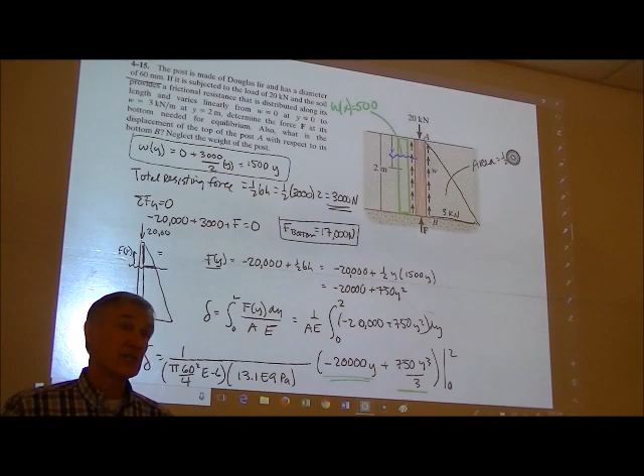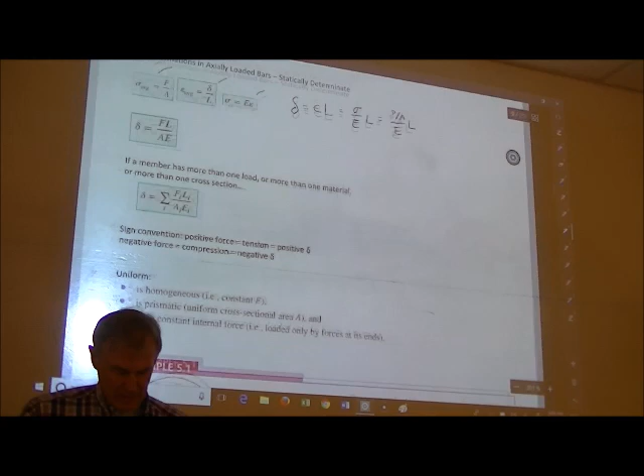And I'm just going to back up a little bit. Oh, wait a minute, it's not in this one. It's on this one. So let me see if I still got it. Yeah, here's the list of equations I just copied out of the book. Where are they? No, I guess I didn't do it. No, I'm so sorry, I don't have them. Because this is dynamics, and this is that. Well, anyway, I started copying all the equations out of the book.

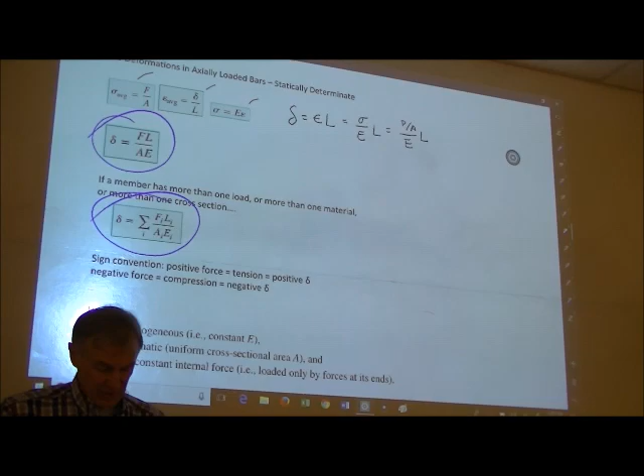Okay, so last time we talked about axial deformation. We derived our delta equals FL over AE magic equation. We talked about the fact that deltas are the sum of all of those things, depending on what kind of configuration it is. We talked about that one, and we did that one.

And then we did those which were just a little bit odd. So this isn't a big part of the course, but it's a good skill to know. I might be able to give you a small question on an exam. Sometimes on exams we do big questions, which would be the most important questions, and maybe some small point questions, like 10-point questions, to see if you understand some of the minor concepts. So this would not be a 25-point question, but I might give it a 5 or 10-point question on something like this to see how much you remember.

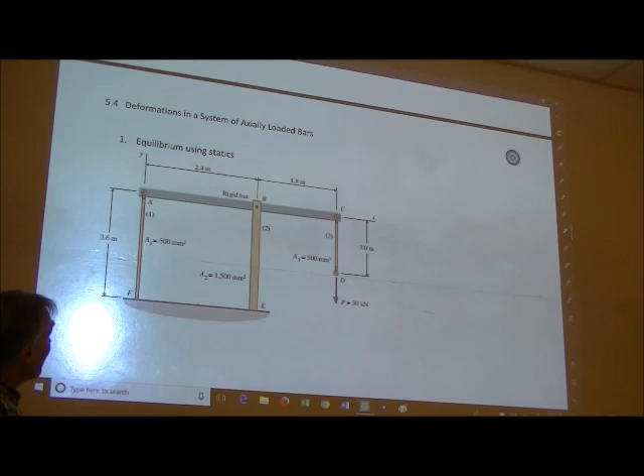All right, let's talk about axial loaded bar systems, or systems of axial loaded bars. This is pretty straightforward, I think, but if you're going to pull down on here, you're going to cause... okay, the concept of the rigid bar means that often there's some piece of this structure that, quote, doesn't change shape, right? It's rigid and made of some massive material compared to the rest of the stuff. Even if it does bend a little bit, it doesn't bend enough for us to take into account its own deflection.

And we'll get to beam deflection and bending anyway, but for right now, that's a rigid bar. All right, so what do you suppose is going to be the deflection of those other two bars? What would you think? If I'm pulling down here, is this one going to be in compression or tension? Is this one going to be in compression or tension? What do you think?

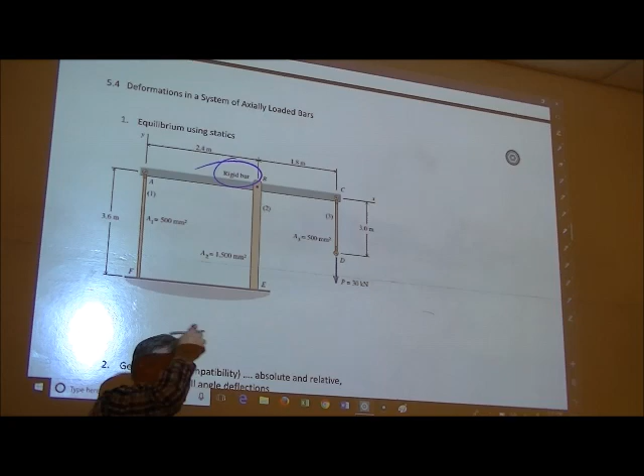Tension for A and compression for B. So if you sum the moments about this point, that's a good way of getting started. Or you can sum moments about the other one. But if I did that, I know that this one has to be going down, which means this bar is going up—there's going to be tension in this bar.

If you sum the moments about this point, then the force in this one has to be going up. So anytime you have force toward a joint, that's a compression joint. Anytime you have force away or pulling away from the joint, that's a tension member.

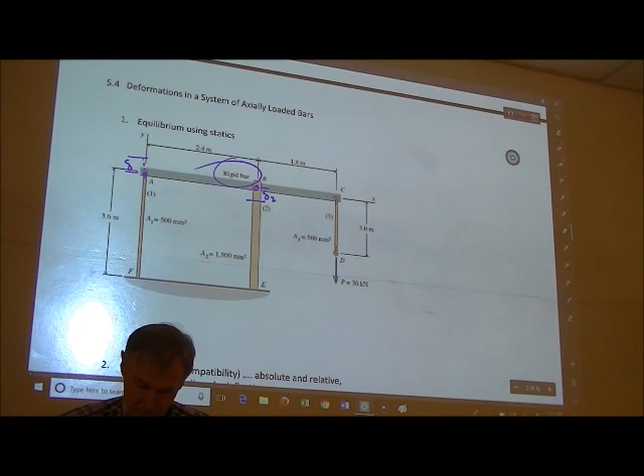So what's going to happen is this one is going to deflect upward when it gets there—that's the delta. And this one is going to be deflected downward, so that'll be the delta of 2. Then this one, because it's a rigid bar, you just connect those lines, assuming a straight line. And now this one would be the delta of C, we'll call it. So something like that will happen.

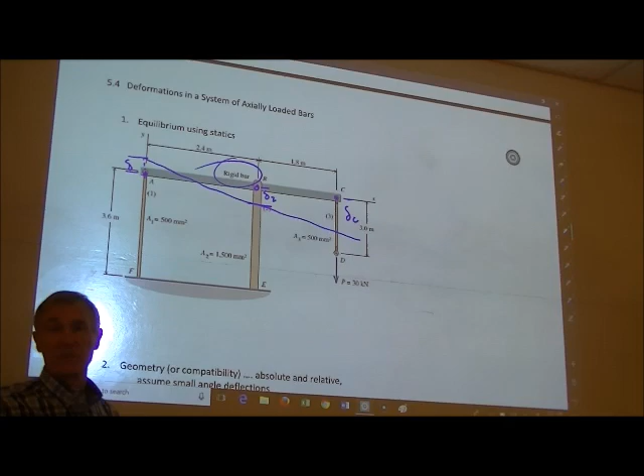Does that make sense? So what we'll do is use systems of similar triangles in order to find out what the total deflections might be.

Now this particular one here, if this is point C and this is point D, D may actually have some of its own delta as well. In other words, it may be stretched, so you may have not only the delta of C, but the delta of its own member that you have to take into account to find out the total new position of D.

Make sense? All right, let's try it. Are we assuming F is locked into the ground? Yeah, F is a pin connection—well, you can't really have two pin connections like that without it being unstable. But in this case, let's call it a fixed support. That'll work okay, and that way it's a stable structure, it doesn't tilt from side to side, and I think the equations will all apply to it.

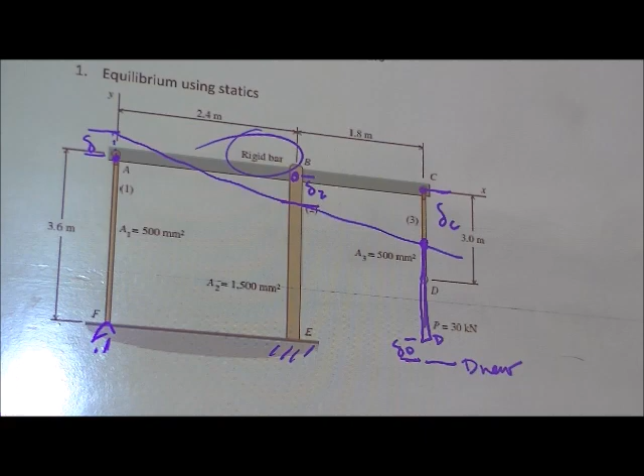So our process is we're going to use equilibrium using statics, geometry or compatibility, and we may do some absolute versus relative. What I would say is this is the absolute—in other words, that is the new position of that.

And then this delta D is going to be equal to delta C—let's put it this way. There's a textbook nomenclature called V, which means position. So what I want to say here is the position of D, V of D, is equal to delta C plus delta D. Does that make sense?

We're going to have the new position of C plus this—let me put it this way. Since that one's not a stretch, we'll call that V, VC—this is probably better. I think this is probably the way the book does it.

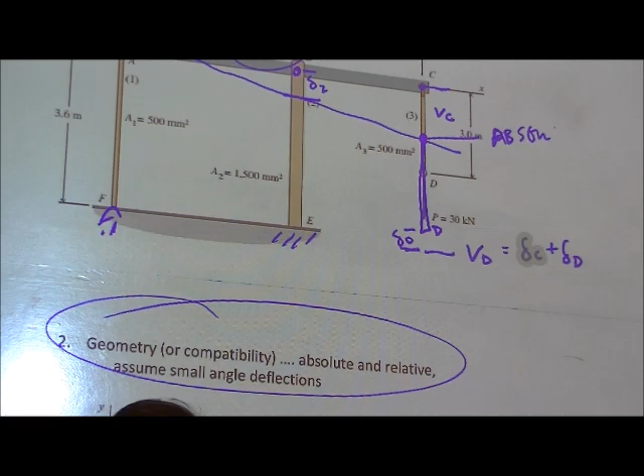In other words, these two are changing position because of delta. This one is changing position just because it's a rigid bar. And then the new position of D would be the new position of C plus the stretch in the bar. So that's what I mean by absolute and relative—this one would be absolute, and this one would be some sort of plus relative.

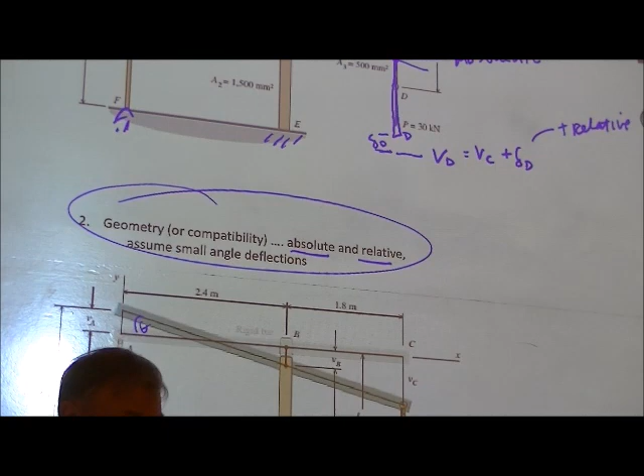We're also going to assume small angle deflections. In other words, at this point we're not considering that these thetas are going to be very meaningful—we're going to use small deflections, small displacements. So again, the process: we'll start with equilibrium, then look at some geometry, and then do the force deformation equation for each part.

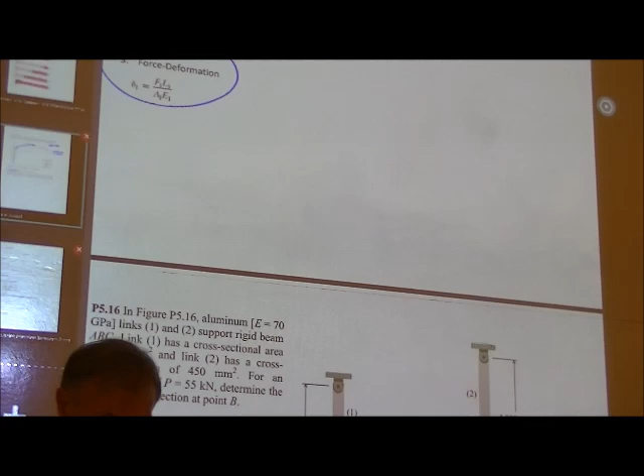All right, so let's try it. And where's my notes?

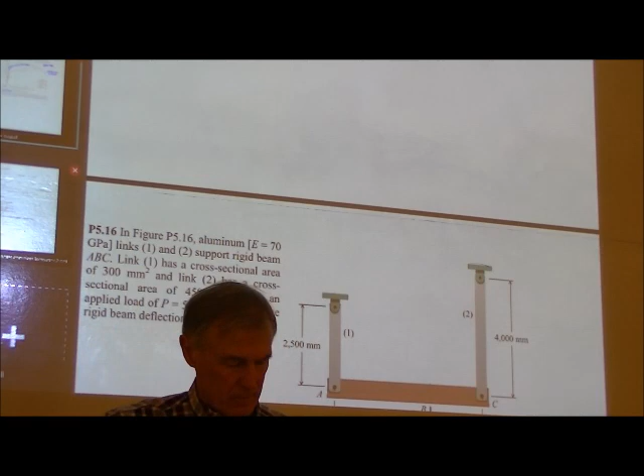All right, so figure 516, we have an aluminum link and a rigid beam. Actually, both of them look like they're aluminum, and the beam ABC is rigid. Link 1 has a cross-sectional area of 300 millimeters squared, and link 2 has a cross-sectional area of 450 millimeters squared. We're going to apply a load of 55 kilonewtons and determine the beam deflection at B.

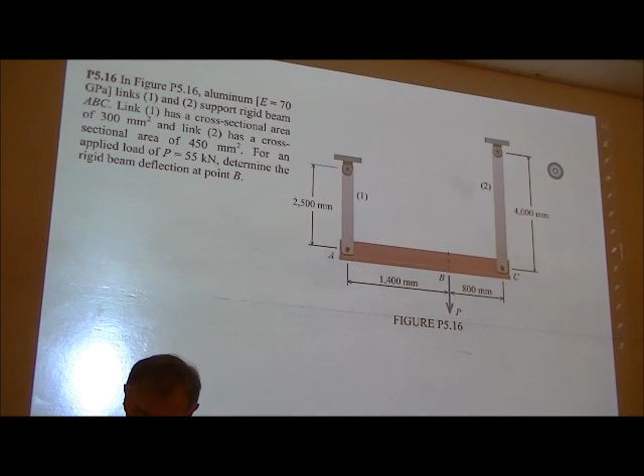All right, before we even get started, let's imagine what it might look like. I'm going to be pulling down here, so this one is going to have some stretch in it—there's going to be some deflection. This is going to have some stretch in it too, so here's going to be the new position of the bar.

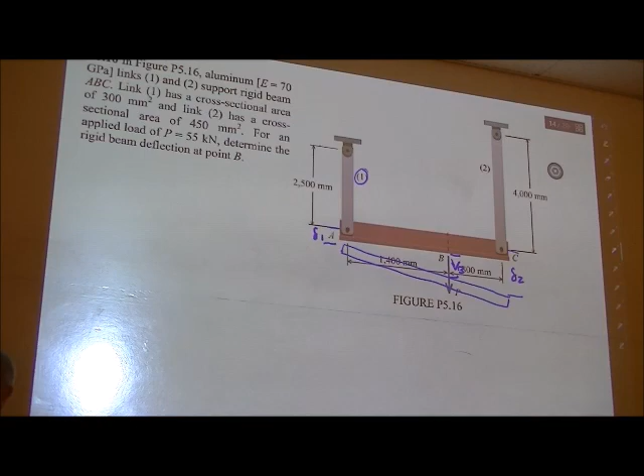So what we're looking for is this V and this delta. We'll call that delta 1, because it's bar 1, and delta 2, because it's bar 2. The V is going to be the position, and there's no actual stretch, no actual delta that we're going to be doing there. Does that make sense?

All right, let's see what we got. Start with statics, equilibrium. I'm going to sum the moments about A. Here I've got minus—let's see, P here says it's equal to 55 kilonewtons, so minus 55 kilonewtons times this 1.4 meters.

And so that's going down. This one is going to be in tension, it's going to be pulling up. So I'm going to say plus force in 2, and the lever arm there is 1,400 and 800, so that's 2.2 meters. And that's equal to 0. So I can solve for the force in 2 is equal to 35 kilonewtons.

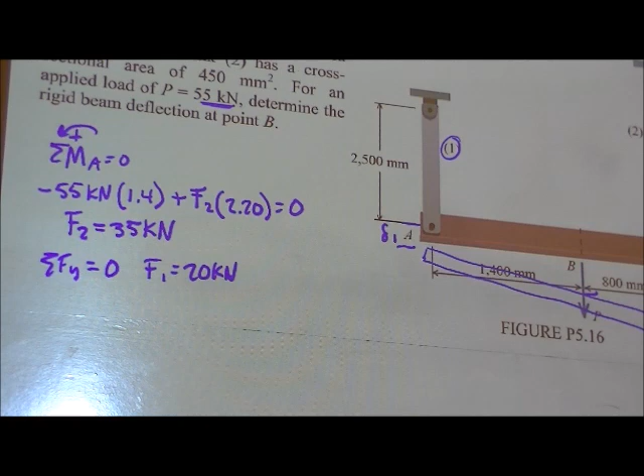And I can sum of the forces in the y equal to 0, and I can find F1 is equal to 20 kilonewtons. Nice round numbers on these textbook problems. So those are the two forces that we need to start with. That's the way we get started.

All right, next thing we do—I better put equilibrium. Next thing we're going to do is the compatibility, right? So compatibility. All right, so that says that

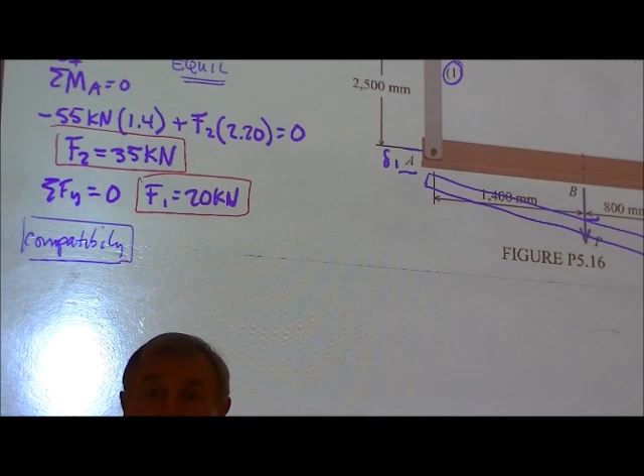In this case, the compatibility is just this similar triangles look. So I'm going to say that delta here, delta 1 and delta 2—let's see, so there's going to be this, that, so B, B. This is going to be my similar triangle. It's going to take into account that delta.

All right, so I'm going to say that delta 2 minus delta 1 over the total length is going to be this triangle right here. So that's going to be, the total length is 2.2 meters. That's going to be equal to VB minus delta 1 over 1.4 meters. So what I'm defining here is this distance here, that similar triangle, and then this one right here.

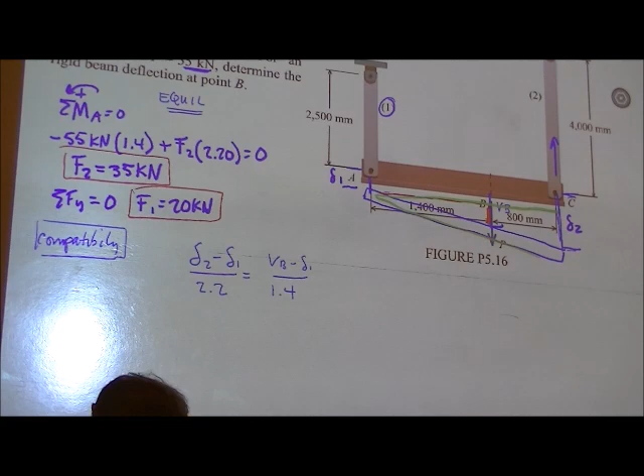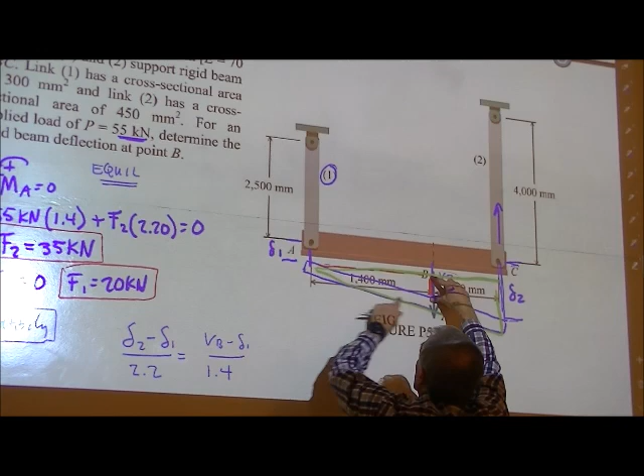Does that make sense? So let me get in here and I'll point to it. This is my—because it's pulling all the way down, this is one triangle right here, and then this is the other triangle here. So this distance here, VB minus delta 1 over this distance, is the same as delta 2 minus delta 1 over this total distance.

What's V? V is a position, because there's not a stretch really associated. We use delta for the actual elongation of a beam or a bar or something, and so a position is just V. That makes sense. So V minus the stretch in delta 1 is how much that distance is right there—the triangle set.

All right, so that's compatibility. Can't really do anything with that until we then look at the force displacement. So let's look at force displacement.

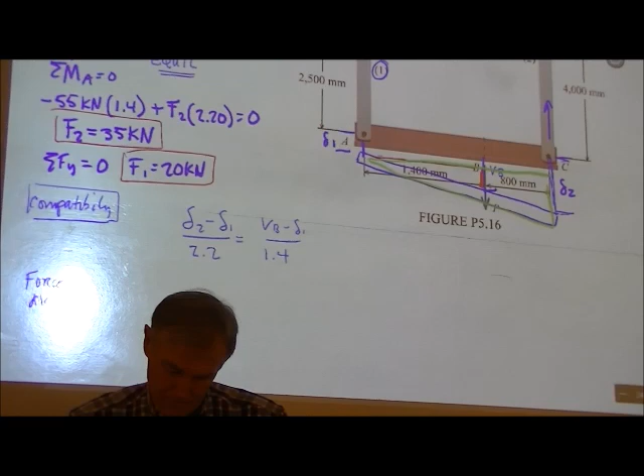All right, now here I do the delta is equal to FL over AE of everything that does stretch. Let's see what that is. So we'll say delta 1 is equal to F1 L1 over A1 E1. And these are all in tension, so we don't have to worry about positives or negatives there.

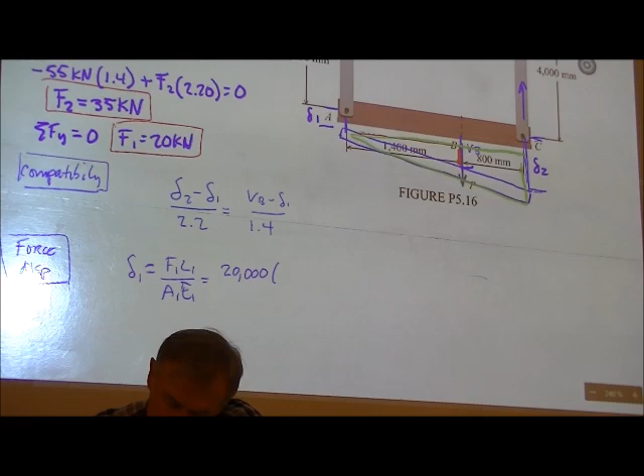So let's see what I got. Actually, I know what F1 is, so I'm just going to put it in here. This is going to be 20,000 times L1, and that's going to be 2.5 meters—that's that distance. I'm given the area of link 1, and that is, this cross-sectional area, 300. Now those are millimeters squared, so to make it into meters squared, you have to divide by 1,000,000. So that would be E minus 6 meters squared times E of aluminum is 70.

And gigapascals is E to the 9th. And so there I can calculate the delta, and that is going to be 0.00238 meters. And you can keep it in meters or you can put it into millimeters, but I think meters works okay.

All right, how about delta 2? That's going to be F2 L2 over A2 E2. And I have that is going to be 35,000. It's got a different length, so that's 4 meters. It's got a different cross-sectional area, so that'd be 450 E minus 6. And it does have the same modulus of elasticity of 70 E to the 9th. And I can get that is equal to 0.00444.

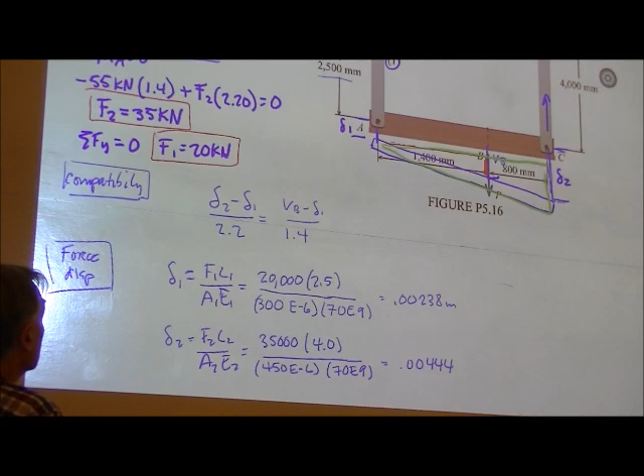All right, so then what do we do? We just plug them into the equation that works. I'm going to plug this one in here, and that one in there, and solve for VB. That's what we're looking for. So how did I do that? I just found delta VB was equal to 0.00369 meters. I'll let you guys crank through all the arithmetic.

So this is kind of typical of a statically determinate system of bars. Statically determinate means there's no unknowns, we can solve the equilibrium equations with statics. These are fairly straightforward. Now we're going to move into statically indeterminate structures, which are a little more complicated. But they're just as much fun, there's just a little more work. All right, any questions about this?

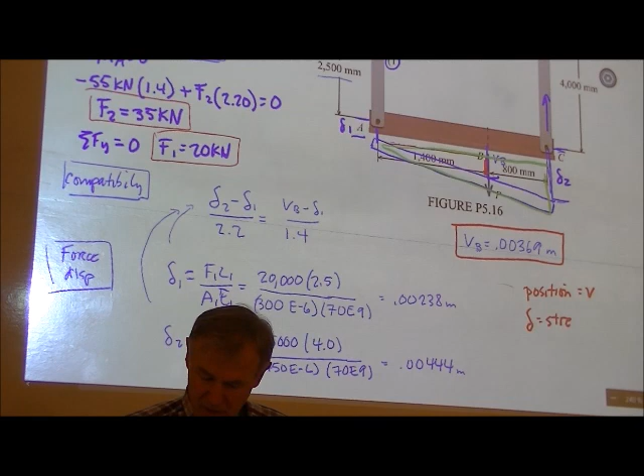Well, I guess we introduced a concept here of position is equal to a V, and delta is equal to a stretch. So if I forget and use V's and deltas interchangeably, they shouldn't really be interchangeable. They should be used properly here, but sometimes I'll forget, so you help remind me.

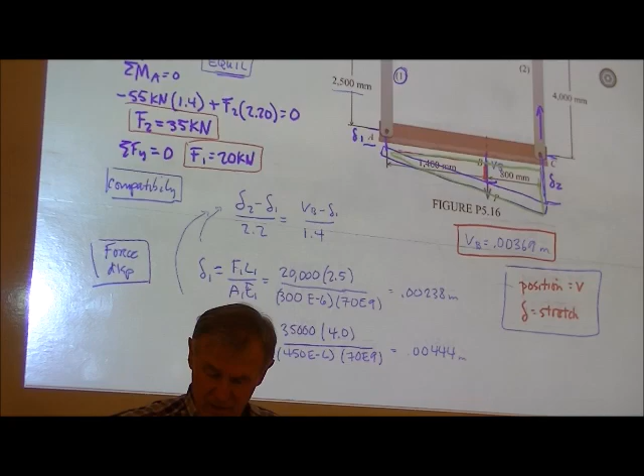All right, so let's just look at this picture here. What is the difference between these two pictures? This is the one we just did, or one just like it. No, it is exactly the one we just did. What about this one? Why is this one statically indeterminate?

We don't know how much force is going through each of the bars. Yeah, we don't know how to distribute the forces. We know that all three of those bars, well, I guess we don't know for sure, but we would expect that all three of those bars are going to stretch as you pull it down. But how much force to distribute to each of those bars depends on how much they stretch and what those materials might be. For example, let's say the one on the right was a rubber band and the other two bars were steel, would you expect the rubber band would take very much of the force? Or how much would it stretch?

Not very much, right? Because it's not going to take very much of the force since it's made of rubber. How about if the middle one was a rubber band? Would you then expect most of the force to be distributed on the outside ones? Yeah. So that's the kind of way you can talk yourself into thinking that I can't really solve for those forces until I know what material they are and how much stretch they might endure.

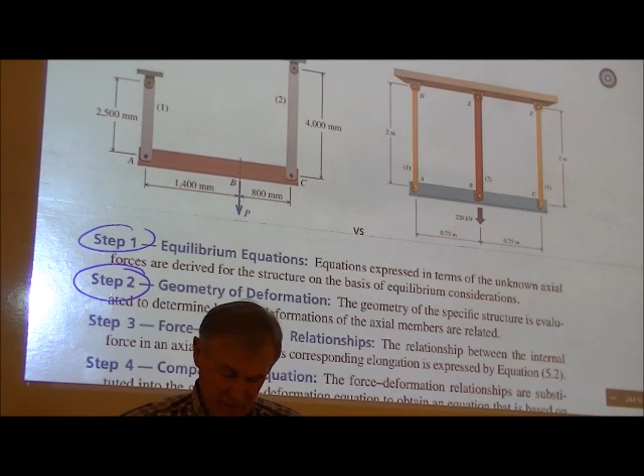And so anyway, we're going to follow the same process. We're going to look at equilibrium, we're going to look at geometry of deformation, and then we're going to do force displacement relationships. The only thing we're going to add is the fact that we're going to put all of these things together into an equation and try to solve for the unknowns. And which equation we use, whether it be the force equation or the displacement equation, kind of depends on the situation, all right?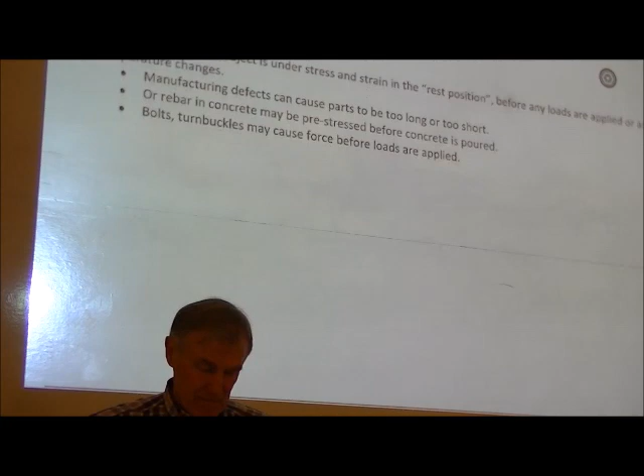So let's see what we got. We're going to talk about misfits and pre-strains next time, but we had some misfits that we talked about last time. Remember when a hole was maybe too big or something like that, and it would actually put the force on another member before it starts stretching on one of the members?

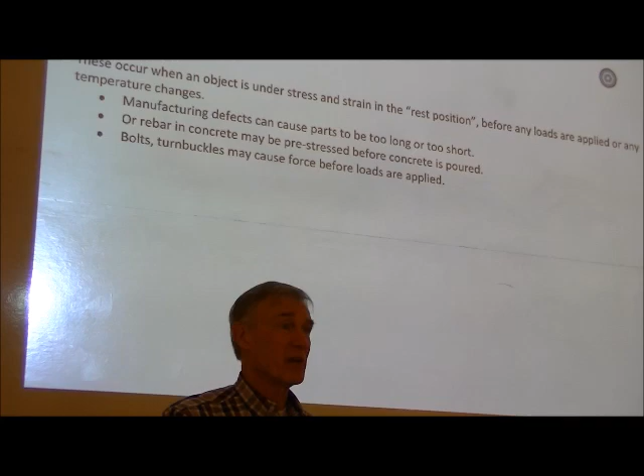So we'll talk about misfits and pre-strains more later. But today, I think we can get to the fact that sometimes there's a gap. Like this one, there's a gap there and there, and so something has to expand and then fill up the gap. That could be a manufacturing defect, that could be just the fact of, whatever, somebody just nailed it improperly, might have a gap like that. We're going to actually go through this one today. So that would be a gap or a pre-strain.

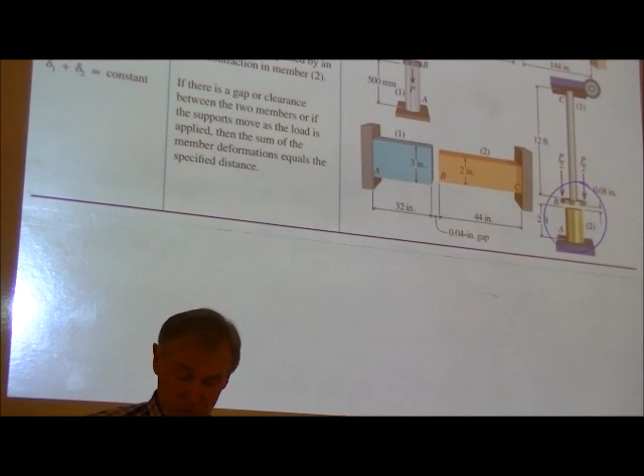So concrete is a good way of thinking about pre-stressed conditions. Anybody know anything about pre-stressed concrete? Well, what pre-stressed concrete is, is that you actually stretch the steel, pour the concrete, and then let the steel go. And so the concrete is actually in compression at the beginning, and it just makes it a lot stronger when we do that. So pre-stressed concrete is a real common way of building in stress, the right kind of stress, before you even apply any other kinds of loads.

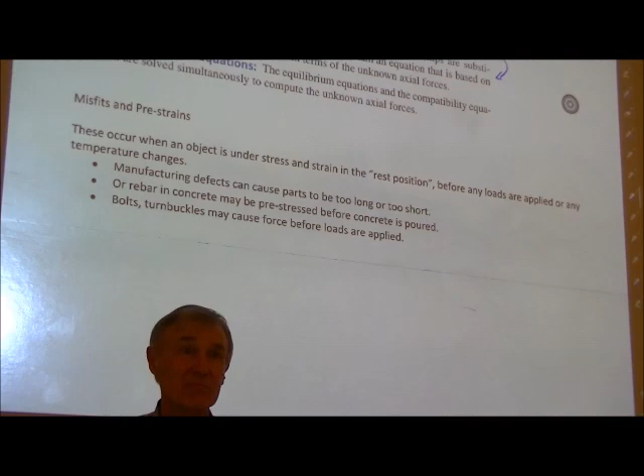All right, let's talk about the process here. Again, we're just going to set up equilibrium equations, use geometry of deformation, and do the force deformation relationships.

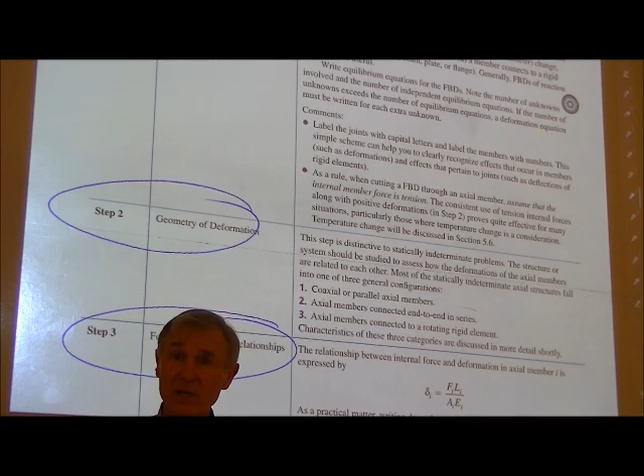I didn't put this in your notes, it's straight out of the book, but if you want some long-winded examples of what we're going to talk about, you're welcome to read those. Those are good. When we draw free body diagrams, we'll try to draw the free body diagram of the joint.

You can see which way the forces go. As a rule, we're going to assume tension and assume a positive delta. In other words, we're going to mostly draw the forces, even if we know they're in compression, in tension, and draw all the deltas as positive, even if we know they're going to be negative. That way, when we solve for the forces, it'll be a negative force, which should agree with our assumption, and when we solve for delta, it'll be a negative delta, which will agree with our understanding, not the way we drew it.

So we should get used to, when we solve things, getting negative forces and negative deltas.

All right, let's see what we got. A bunch of different kinds of problems we're going to go through over the next couple days. Today we're going to do axial loaded bars, and we're going to do this gap one.

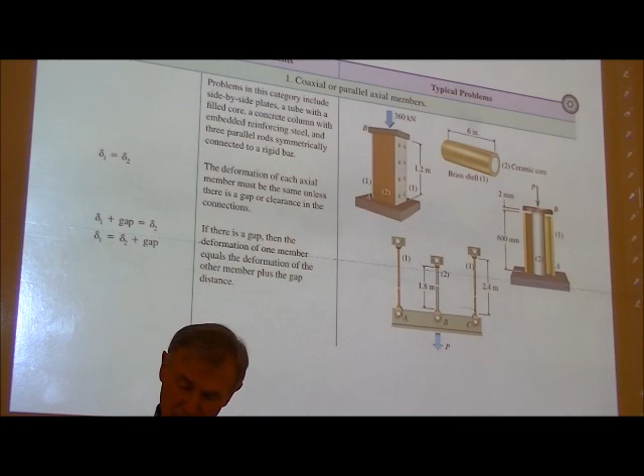All right, so let's talk about this. Here is a concrete column that has a point load. Now, first of all, let's go back to what we talked about last time. What do we assume about arrows with point loads here? What are we generally assuming?

We're assuming that all the force is concentrated on a little teeny tiny spot. What are we assuming? Equal distribution. Yeah, we're assuming an equal distribution using what principle? St. Venant's principle. So even if it actually sits on the column with a point load, we're assuming that with a very small difference in depth, just not very far down, everything's going to even out and it'll be evenly distributed.

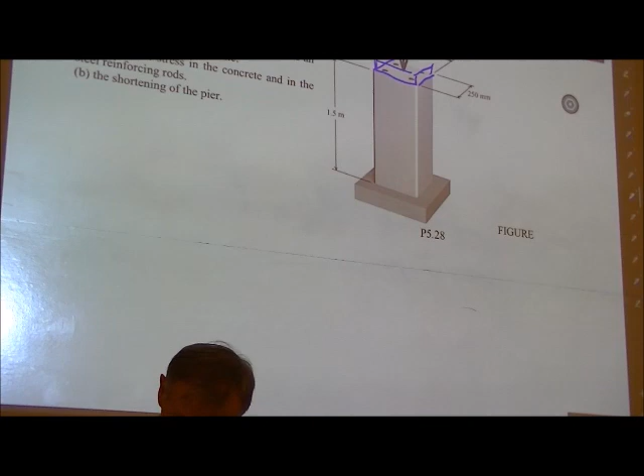Another way of drawing this thing would be to put a big steel plate on the top, like this, right? And then you could say that I'm going to push on the plate, and by the time it gets down to the actual work, it's already distributed, if you will, all right? But we're not going to focus too much on that. All we're going to do is assume it's evenly distributed, and pretty nice.

All right, let's see what we got. So we have a 670,000 Newton load on top of this column, and it's got 4 steel bars in it. This is concrete. We want to find the stresses in each of the rods and the stress in the concrete.

Okay? Now, this is all built together as one assembly, which means that if it all shrinks together, the deltas are going to all be the same. Okay? But the forces, how the concrete and the bars distribute those forces, are going to be a little bit different. So let's see what we got.

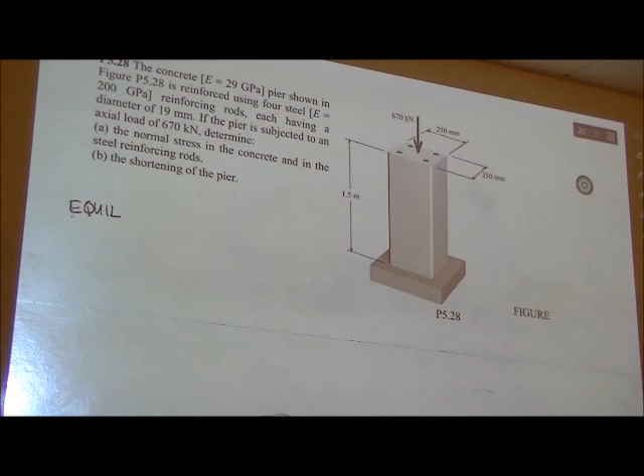First of all, let's do equilibrium. All right, so I'm going to say that the steel is going to be pushing up, and I'm going to say that the concrete is going to push up. So let's just say it here: the force of the steel plus the force of the concrete minus the 670,000 newtons is equal to 0. All right, that's all we can do for equilibrium.

Let's talk about geometry. All right, here the only thing we're talking about is what do the deflections look like? And all we're going to say here is that the deflection of the steel equals the deflection of the concrete. So that's all there is: deflection of the steel equals the deflection of the concrete. Everything's stuck together.

Now we do force deflection, or force displacement, on each of the pieces. So we'll say force deflection.

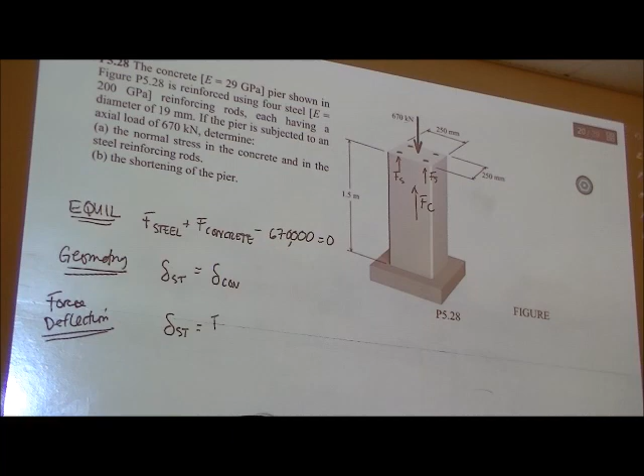All right, I'm going to say that the delta of the steel is equal to the force in the steel times the length over the area times E.

All right, let's first talk about areas. What is the area of the steel? Well, steel is rods, so let's see what we got. Steel: pi d squared over 4. Yep, is equal to pi d squared over 4. And so these are pi.

The diameter is 19 millimeters over 4, and I'll generally just keep them as millimeters, and then I multiply it by E minus 6, because you got 1,000 millimeters per meter. You got that squared. And that's equal to 283.52 E to the minus 6 meters squared.

Okay, that's the area of one. But I got 4 of them, don't I? So I have to put that 4 in someplace here. I can either multiply this by 4 right here, or I can put a 4 over here. Either way you do it, but you have to multiply it by 4. So I'm gonna put it in when I put the numbers in. So let's just put it this way.

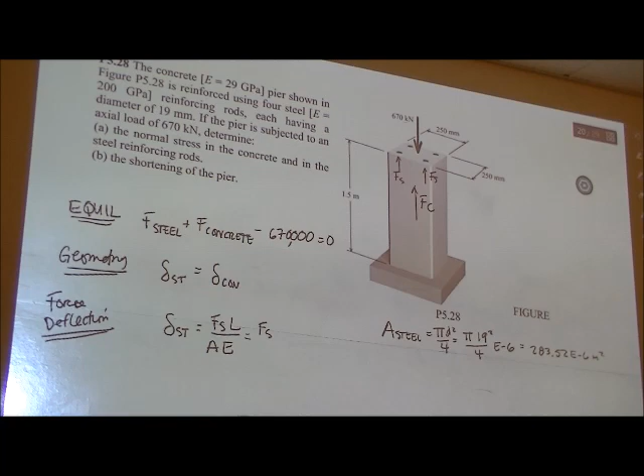So this is going to be the force in the steel times length is 1.5 meters. All right, so I'm going to say 4 times 283.52 e minus 6, that's my area. And then the modulus of elasticity of the steel is 200 gigapascals, so 200 E9.

I have a quick question. Yep. Are you allowed to put the 4 with the equilibrium forces? You put 4 times the steel? Yeah, because technically you drew 4, right? Even though you are only showing 2 on that. Like the force is going up. Does that make sense? Yeah, okay, that's a really good question.

Then if it's only like representing one total force of the steel, shouldn't there then be one arrow going up? Okay. You can... I don't think so. The reason is because that geometry equation requires that those geometries get matched up. So let me proceed to the next step, and then let's ask that question again and see if it makes sense, okay? So that's a really good question. Do I have to multiply the area by 4, or can I multiply the force up there by 4? And I believe that multiplying the area by 4 is the right way to do it.

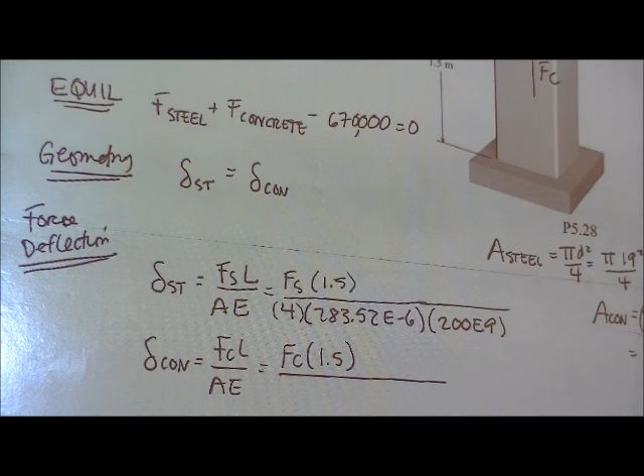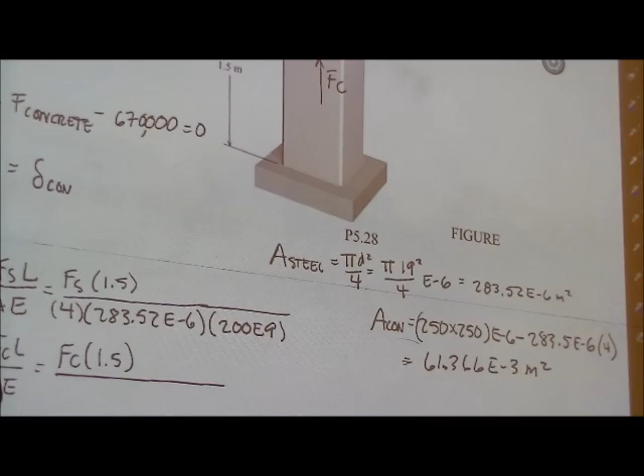All right, so let's go ahead and put the area and the modulus of elasticity over here. So this is going to be 61.36 E minus 3 meters squared times concrete is 29 E to the 9th pascals.

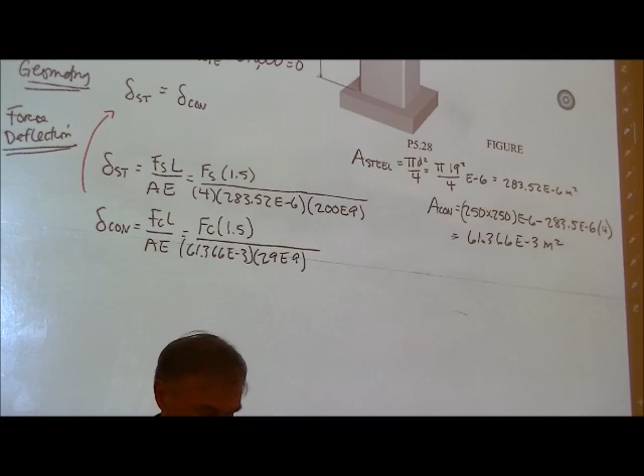And now what we're going to do is, I can't really solve for those because I have 4 unknowns. I don't know the deltas and I don't know the forces. So what do we do with 2 equations, 4 unknowns? Well, we start substituting and see what we can get. So the first thing we're going to do here is I'm going to substitute both of these guys into that, and let's see what we get. So let's solve this for one of the forces. I'm going to set this up. I'm going to say force of the steel times 1.5 over, and I multiplied all this stuff out.

So I say that that is equal to 226.8 E to the 6th. And that's going to be equal to the force of the...

Okay, I'm sorry, I'm putting all this stuff into those equations. So this is the force of the concrete, and that's got 1.5 as well. And I multiplied all that stuff on the bottom there, and that is 1778 E to the 6th.

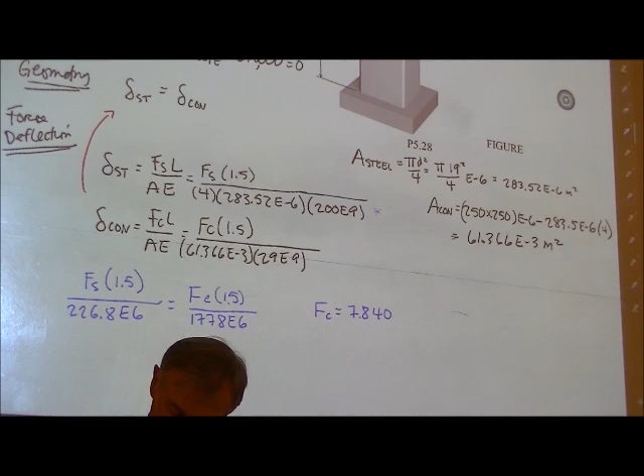And now I can get the force of the concrete is some factor of the force of the steel, and that is 7.840 force of the steel.

Okay, everybody see what I did there? Just plug those things into that geometry equation. Now I have the factor, and now I have the force in the concrete as a factor of the force of the steel. And now I can plug it into the equilibrium equation and start solving for something.

So now I solve this into that equation. So let's see what I got. So the force of the steel plus the force of the concrete, which is 7.840 force of the steel...

equals 670,000 newtons, and I can solve that for the force of the steel, which is equal to 75,796, and the force of the concrete is equal to 594,204 newtons.

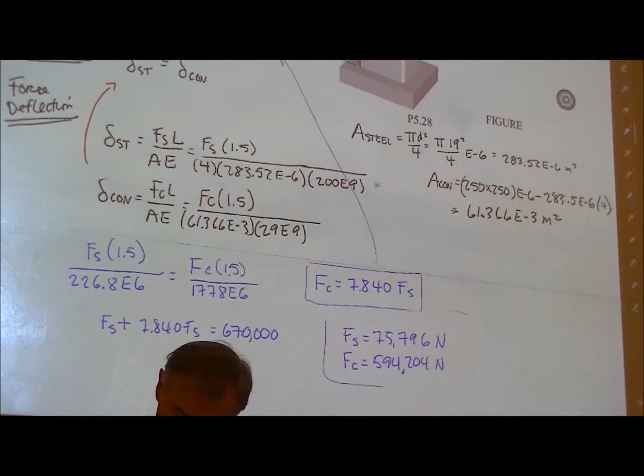All right, I don't want to go down too big of a rat hole here, but let's imagine that instead of multiplying the area by 4 up there, I kept all those the same. What that would have meant was this would have been divided by 4. In other words, this would have been something like 55 e to the 6th.

See what I'm saying? If this was 55 e to the 6th down here, then I would have got quite a bit different factor for the force of the steel. And plugging that into this, I would have got quite a bit different answers. It wouldn't just balance out because...

Why don't you do it and tell me? Because I didn't do it, so I don't know. Okay, but it might be. It might be, maybe you could multiply. Yeah, Rosalind, what's the answer there?

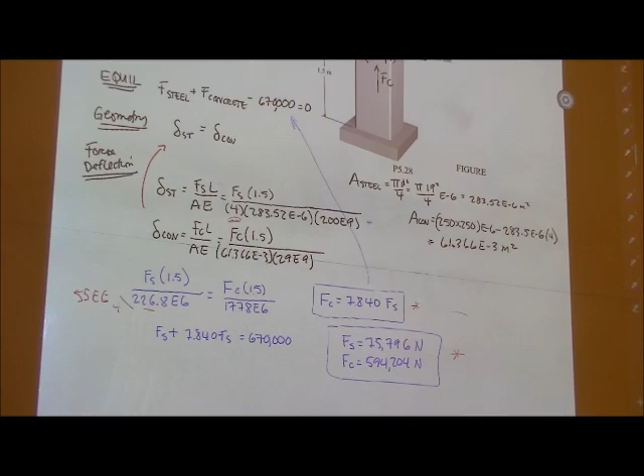Well, I'm just curious, if you don't multiply the area by 4, you would have 4 F steel plus F concrete. Yeah, that's what you'd have to do. If you had a different factor here, then you'd have 4 F steel plus FC. Maybe you still get there.

But then your deltas are wrong. Right, because then the deltas are wrong here, since I want to solve for the delta using the actual force of the steel.

I don't know, maybe you could make it work. Could you make it work? A factor for it, but you just have to find a weird place to go.

Okay, if anybody wants to play with this and tell me what the answer is, I'll work on this over the weekend and see how sensitive it is. See if you can do it both ways. Because I sometimes don't know when you add that factor versus when you don't.

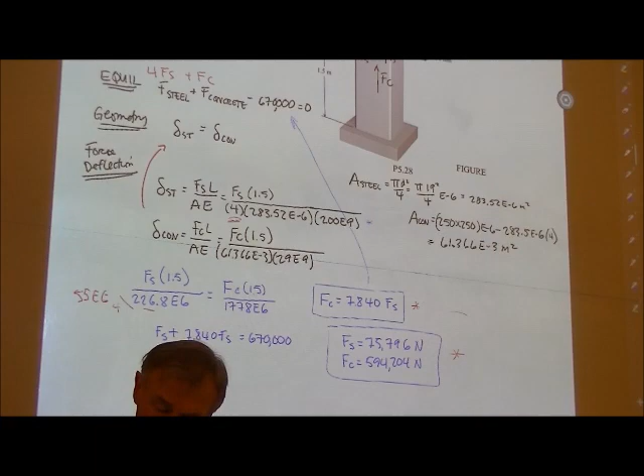All right, well, tell you what. For now, if you have 2 materials, multiply, put it in with the area. Okay, and here's a few more examples that we'll talk about.

Things like this one, this column here, where it has a plate on one side and a plate on the other side. Instead of saying you could multiply the area by 2 in this case, and I know that works, it seems logical that it would work by multiplying the force by 2 or the force by 4 in this, but aren't you just saying that the force is 2 different kinds of forces, right?

Your original steel is all of the force acting on all of the steel. Yeah. And then the other one is just a single one. It's just, yeah, single one, so...

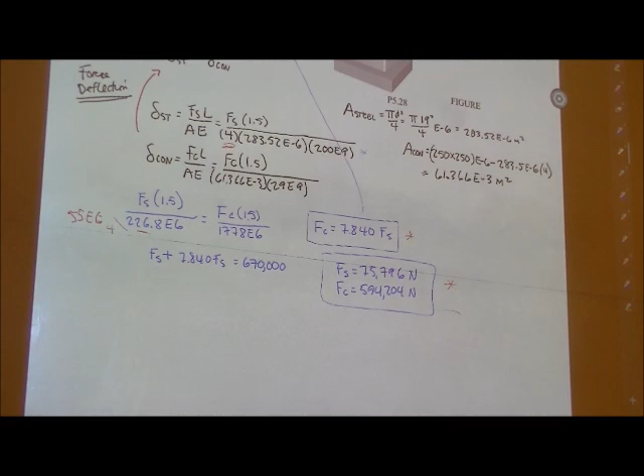You took out... yeah, it doesn't work. You need all the area in the delta function. I kind of think you need all the area to make this equation work properly.

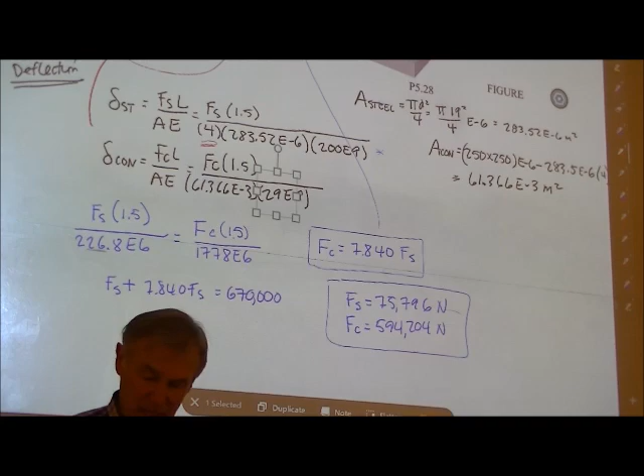I think so. So for now, let's multiply the area by 4 and not multiply the forces by 4. We'll keep the force at the total, and if anybody can prove to me it works the other way, then I'm happy to retract that. Okay, let's continue on. What we're looking for is the stress. Now that I have the forces, it's pretty easy to do the stress, isn't it?

All right, now we want to get to the shortening. What is the actual shortening? Let's find the stresses quickly. That's pretty easy. We're going to say the stress in the steel is equal to F steel over A steel, and I'll just write you the answer. That's going to be 594,204, and then we have all of the area, so that would be 4 over 2, or 4 times 283 e to the minus 6. That gives me a stress of 66.96 E6 pascals. And then the stress in the concrete is equal to the F in the concrete over the A of the concrete.

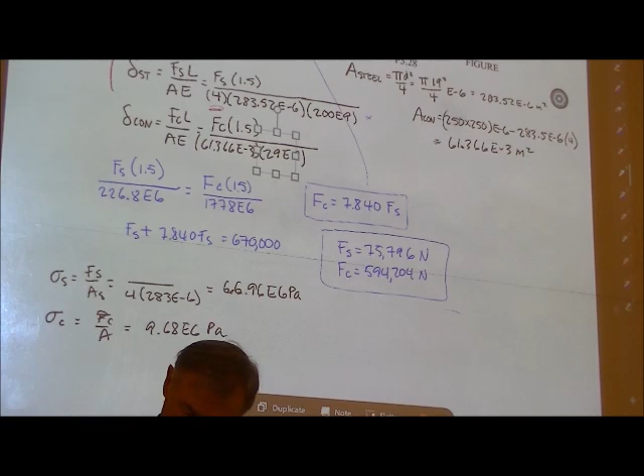That's equal to 9.68... isn't that still 75,000, not 594? Yes, beg your pardon, 75,000. Steel, 75,796. Thank you. All right, so those are the stresses.

Now the delta, you can choose either one. I still think this is probably the best way to do it. But you can take these forces now, plug them into either one of those delta equations, and you should get the same answer. That makes sense? Yeah. The 4 works, I just figured it out. It's all right, so you can have your 4 on the F steel. Your delta function has a factor of the force in it. So if you delete that 4 and just add the 4 to that top equilibrium equation, you're fine. If you divide that one by 4, and then you don't have to multiply that by 4, you should get the same thing. So it probably should work. I just didn't do that. It was bugging me.

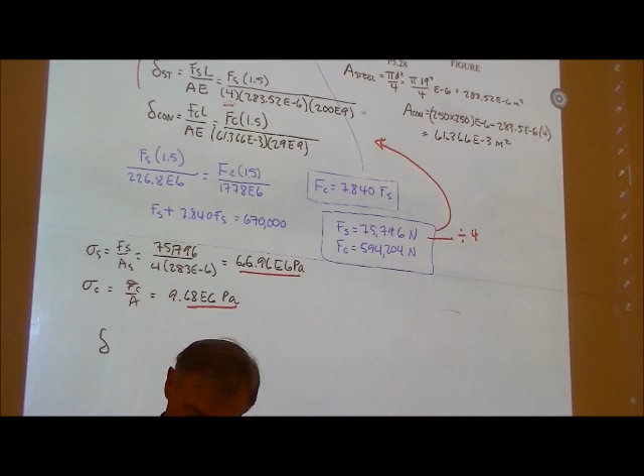All right, so the delta then is this. Delta of either one is equal to FL over AE, and I did it of the steel, and I got that equal to 501 E to the minus 6 meters. So not very much, 500 microns that it actually moves down under this kind of a load. So most of these cases we're not talking about very big deflections, but they are real. And if you get longer members, then they become a little more measurable, a little more important.

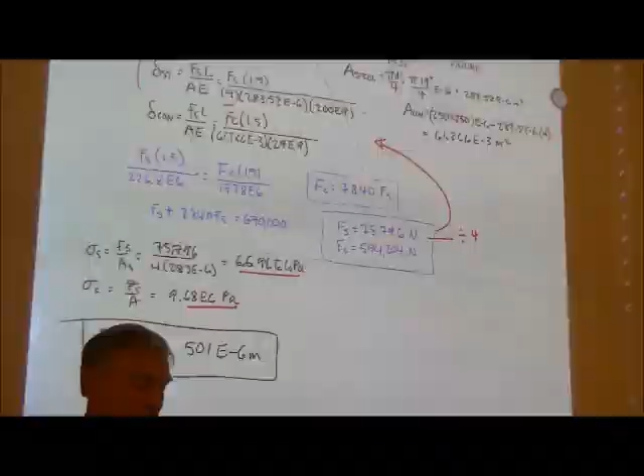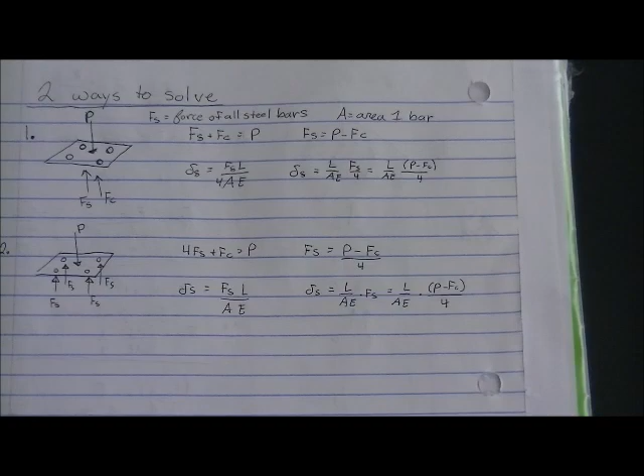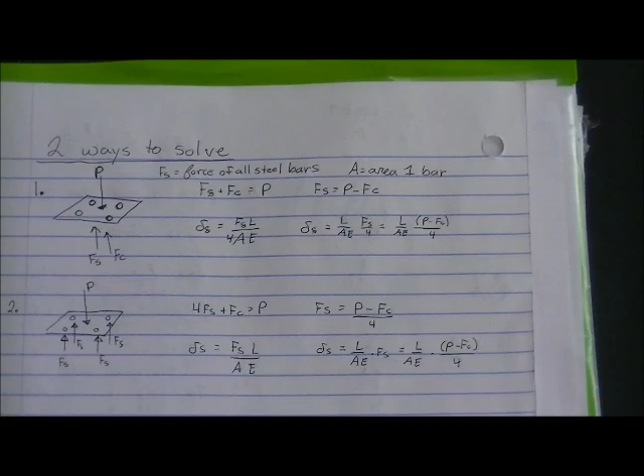Okay, this is an addendum to the class. I'm just visiting with Rosalind, our peer educator, and she did this work. I don't know if you guys can see this, but if you're careful with the forces and careful with the areas, then it doesn't matter whether you multiply the area by 4 or if you multiply the force by 4. But it kind of depends on the free body diagram. If you look over there on the left, the free body diagram in the top one, the force of the steel is the sum of all the forces, and therefore you have to multiply the force, or you have to multiply the area by 4 in order to get the total force. If you look at the bottom one, then you have 4 separate forces, and therefore each force is going to be smaller, but obviously the area is smaller. But in the end, if you're careful, then you should get the same answer, and it shouldn't matter. And obviously, if it doesn't matter, then I don't care which way you do it. All right, hope that works.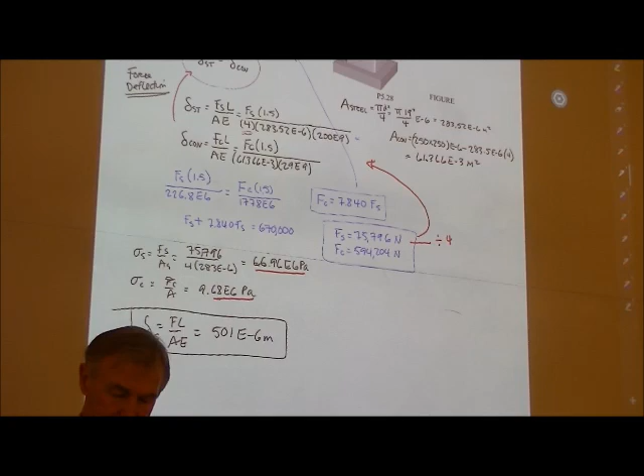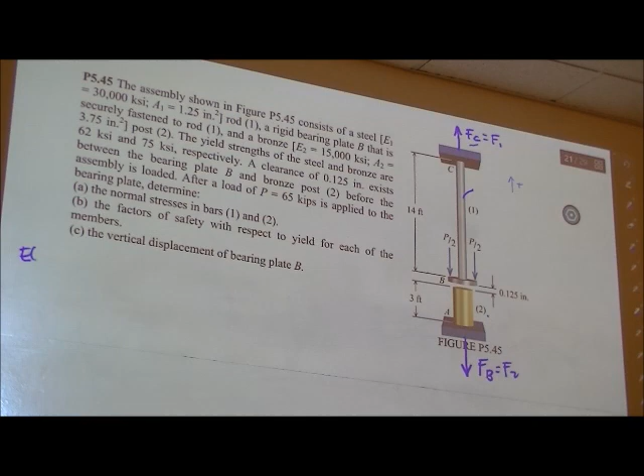All right, so let's do the equilibrium. F1 is called positive going in this direction. So equilibrium: F1 minus F2 minus this pushing force, and the pushing force is 65,000 pounds. So 65,000 pounds is equal to 0. A kip is 1,000 pounds. Those are both going down. F2 is going down, and the pushing force is going down.

All right, let's talk about the compatibility, or the geometry. Geometry, compatibility, those are kind of the same things. What it's going to say is that there's a delta stretch of 1, and there's a delta of 2, and those are going to be equal to that gap. I drew them both as positive, even though I would expect that because the top one is in tension, it will get a positive number for that. Because we know the bottom one is in compression, we should find that delta 2 will be a negative number when we get done with it. But together, they equal that gap of 0.125 inches.

All right, now we do the force displacement equations. Force displacement, and those are pretty straightforward now. I'm going to say that delta 1 is equal to F1, L1, A1, E1, and let's see what I got. I don't know what F1 is, so I'll put that as a variable. The length here is 14 feet, and we need to be in inches, so I'm going to say 14 times 12. The area of rod 1 is given here as 1.25 inches squared, right there. And the steel is 30,000 KSI, which is 30 times 10 to the 6 PSI, so that'd be 30E6. I think all those units will match up. Okay, let's, I didn't do any more multiplying there, so I'm just going to keep it there.

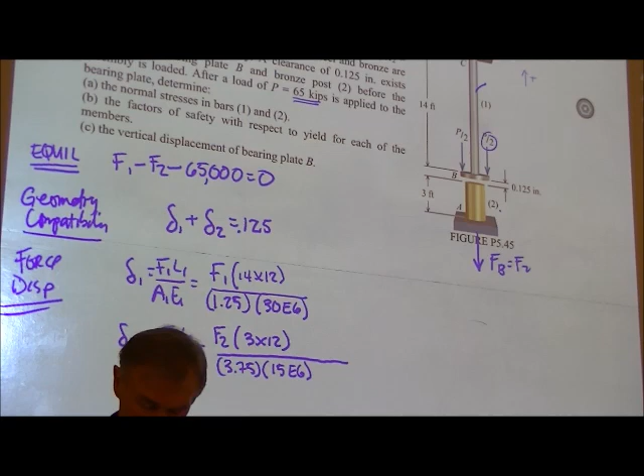And I generally will plug both of those into the geometry equations. Let's just put those in there, right there. So let's see what I got. I'm going to say that F1 plus that stuff on F2 is going to be equal to 0.125. So let's do that: F1, 14 times 12 over A1, E1. I'm just going to shortcut this so I don't have to write everything again. Plus F2, 3 times 12 over A2, E2 equals 0.125. All right? Everybody okay with that? Because I just saved a little bit of writing.

And now I can solve this in terms of one or the other. I'll solve this in terms of F1, because what I want to do is combine them, put one in terms of the other, and then put it back into the equilibrium equation. So I'm going to say here, F1 equals 0.125 minus F2 times 0.64E-6 over 4.48E-6. So now I have this in terms of F1.

I'll plug that into that equation, and let's see what I got. When I plug this in, I'm going to solve this in terms of this. So I'm going to say that this is equal to 29,902 minus 0.14285 F2. That's what this one is. Minus F2 minus 65,000 equals 0. Okay, everybody see what I did? Just did the multiply out, plugged it into that equilibrium equation. Now I can solve it for F2.

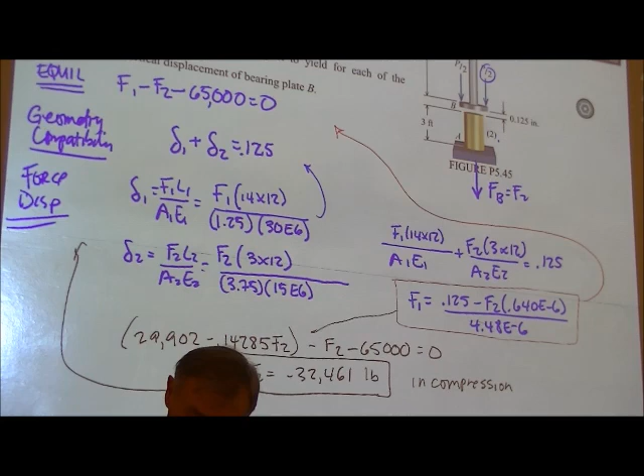You don't have to write that down, but basically it's just to tell us what's going on. Now if I plug that into my equation and solve it, I'm going to get F1 is equal to 32,000, pretty close, 32,539 pounds in tension.

Dumb question, but what point are we looking at to get that equilibrium equation? I'm drawing the equation for the whole thing. However, you could have drawn the free body diagram of that. In fact, I didn't do what I told you guys to do.

Why do we not need 2P here? Because this is P, right? And so we only took one of these? No, there's P over 2 on each side, that's all that says. They're just trying to keep the stress concentrations down by dividing it on both sides.

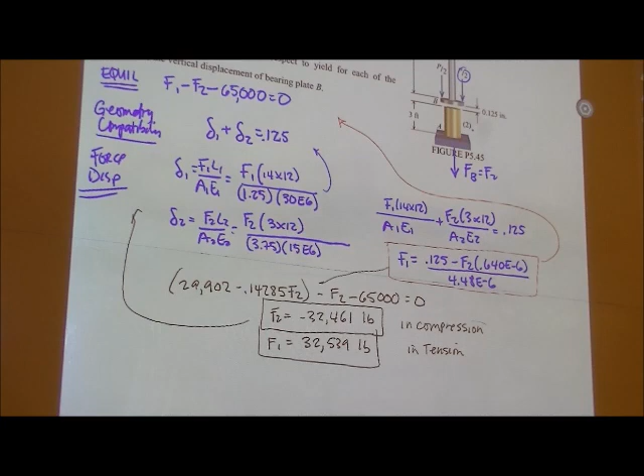So yeah, this equilibrium equation, the way the textbook does it, which I should have done, was draw a free body diagram of this part. So let's just draw a free body diagram of that part, assuming they're mated together. You get negative 65,000, and then something going up here, we'll call that F1 and then F2. That's what it means by drawing a free body diagram of the joint, the place where they meet together. Both tensions, or both forces, are going to be in tension that way if we solve it.

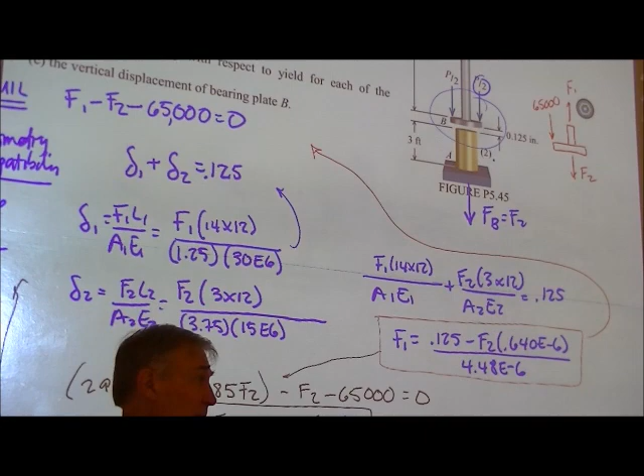All right, now that I've solved for F2, which is equal to a compression force, which we expected, now we can solve for delta. That's the more interesting thing, what is the actual displacement of this point, of B? Well, let's look at this.

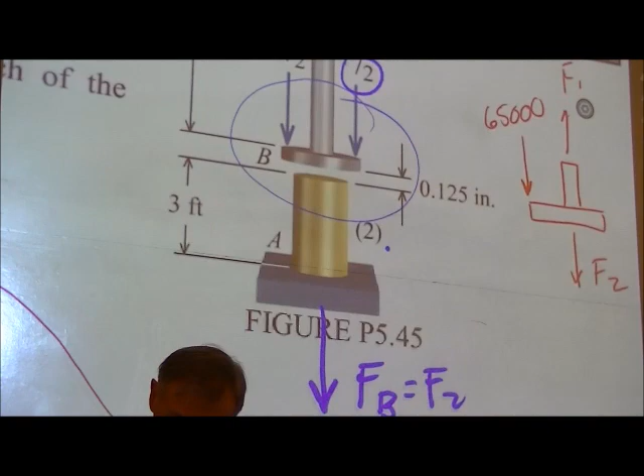Let me just zoom in here and then I'll get back so you can finish copying if you need. The actual displacement of B, assuming that's very thin, is going to be the stretch of the bar, which is going to meet there, and then the compression of that. Does that make sense? It's the stretch of the bar plus the compression. So if I need to know what it actually changes, I have to add those two together. That's really where it's at.

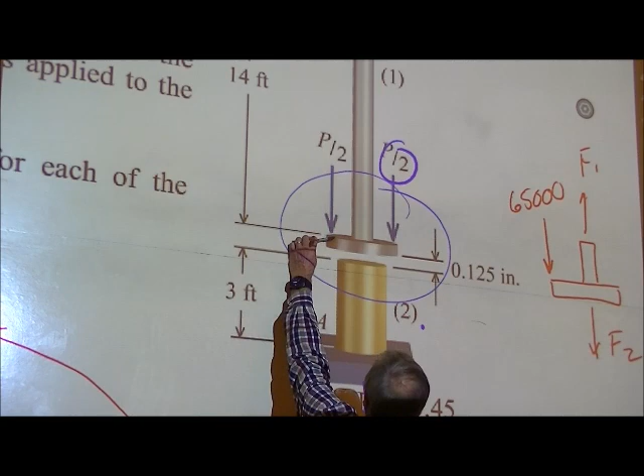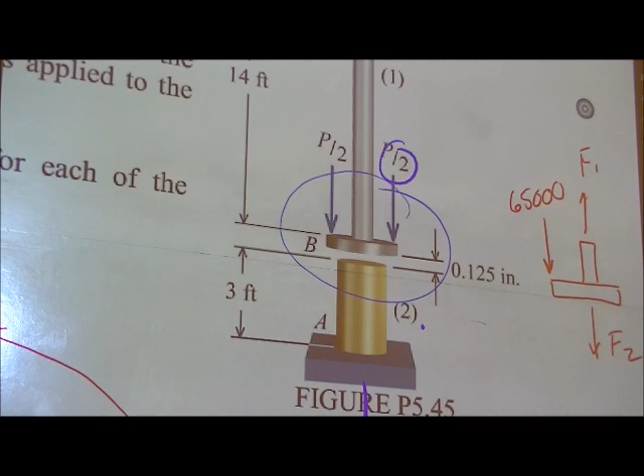All right, so let's see what we got. Because the stretch of this guy is, well, actually, no, let me think about that. Do I have to add them together? Actually, I don't have to add them together, do I? Because whatever the stretch of the top bar is, it's going to go down, meet the gap, and just keep on going. And I have an equation for the stretch of the top bar, which includes all that junk. So all I have to do is say the stretch of the plate, where B, the new position of B, is basically just the stretch of the top bar.

Includes all those reactions, includes the gap that I just overcame, and all that sort of stuff. All right, so let's say the new position of B is really just delta of 1. So delta of 1 is equal to my force in 1, which is 32,539, the length of 1, which is 14 times 12, the area is 1.25, and E is 30E6. You get all that, and that's equal to 0.146 inches.

Now that's pretty significant, that's over 1/10 of an inch. That's a lot. I mean, of course it's 14 feet long, but now we're seeing that it's actually something you can see. Now 1/10 of an inch is, you know, that much, you can see the stretch in there.

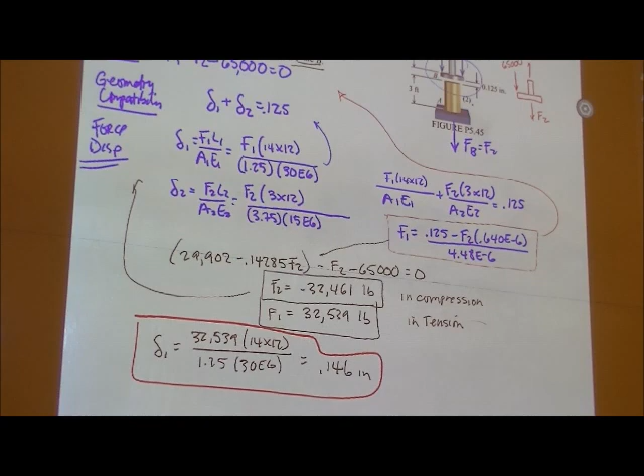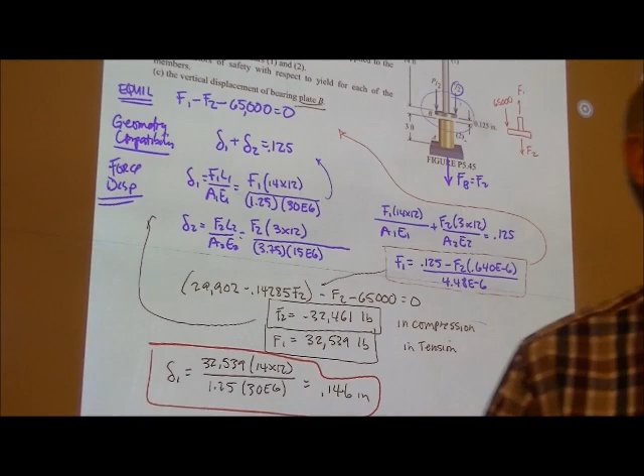All right, any more questions, or any questions at all about how we set the process up? How about you at home? Any questions? I can't hear you. That's nice, I like this. Yeah, students get to talk about it.